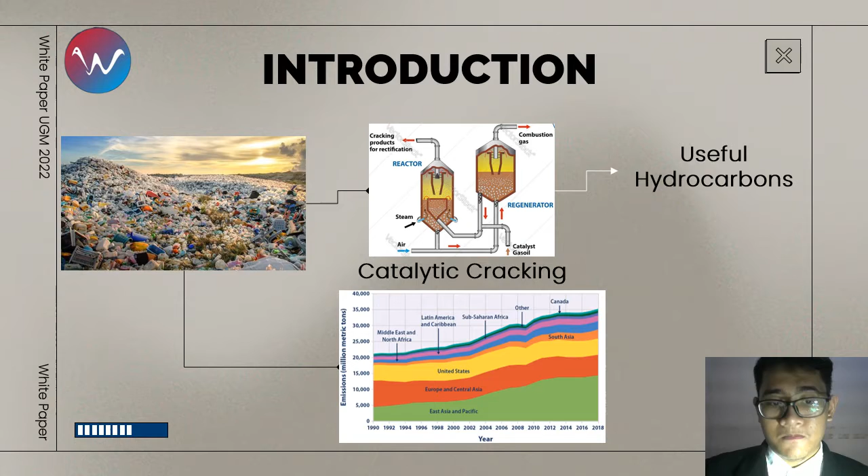Next. So regarding our problems above, what are our solution and designs? We will start with our block flow diagram, in which we will start with plastic catalytic cracking that is done in 400 degrees Celsius. It will produce the required hydrocarbon for steam reforming.

Together with water, it will produce 3 molecules of hydrogen, in which 2 molecules can be used for the Haber-Bosch process with nitrogen that we captured from pressure swing adsorption from the air, and then the ammonia produced can be used for further urea synthesis.

However, 1 molecule of hydrogen will be stored inside a tank, and it can be reacted in Sabatier-Senderens methanation with CO2 into CH4 or methane, which can further fuel steam reforming.

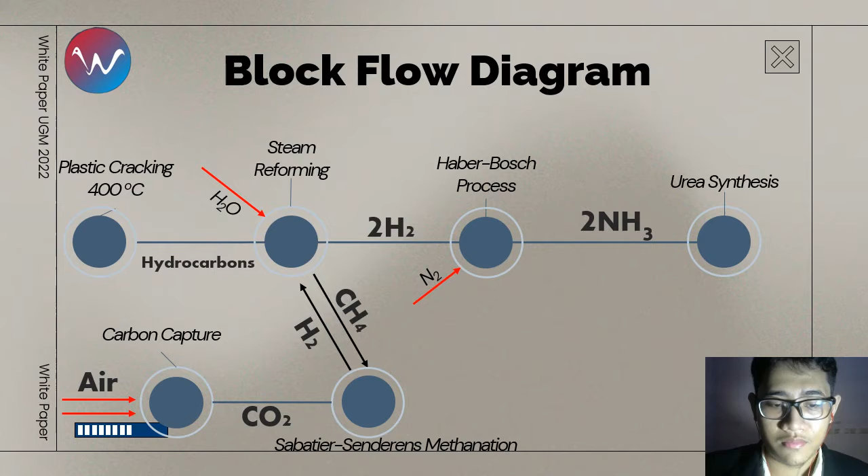We will start with our plastic catalytic cracking process. On the right is our polymer catalytic pyrolysis model, and it will crack the polymer of plastic into the hydrocarbon that is needed as a feed for the steam reforming. Now, the process also requires zeolite catalyst, also with 400 degrees Celsius of constant temperature.

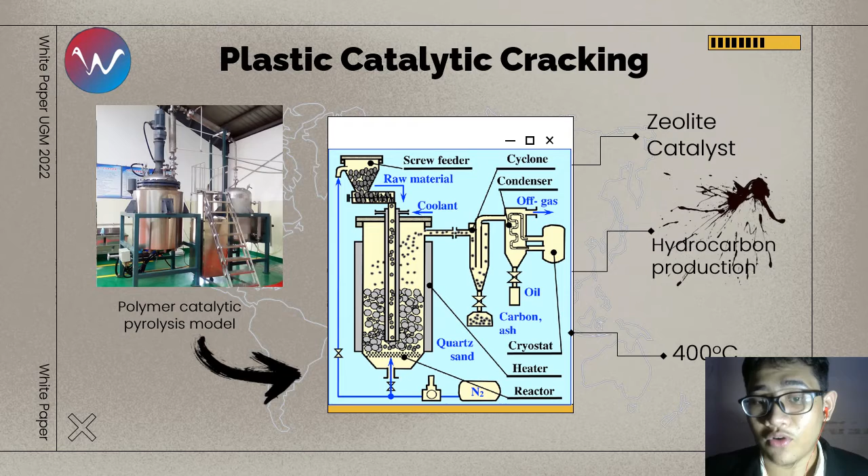Next. And this is our steam reforming model. The steam reforming requires hydrocarbon that is gained previously, and with water it will form hydrogen and carbon dioxide. Now the carbon dioxide will be further used for urea production. However, the hydrogen will, as I explained before, one will be stored in the tank, and the 2 rest will

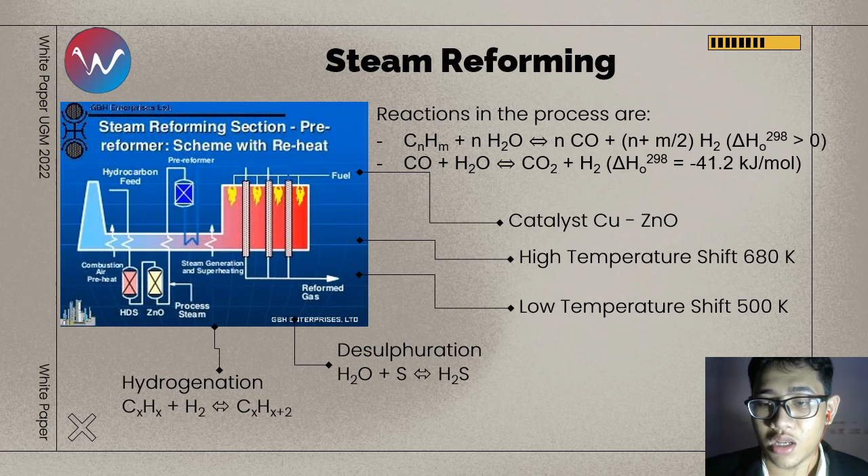be used in Haber-Bosch. Now we will use copper and zinc oxide based catalyst alongside desulfurization and hydrogenation process before the reaction to keep the hydrocarbon clean. There are also 2 types of reaction happening in here: high temperature shift around 680 Kelvin and low temperature shift in 500 Kelvin.

Next. The next is our Haber-Bosch process. The Haber-Bosch process happens at 400 until 450 degrees Celsius within 200 until 400 atm of pressure inside a fixed bed reactor between 3 molecules of hydrogen and 1 molecule of nitrogen, producing ammonia.

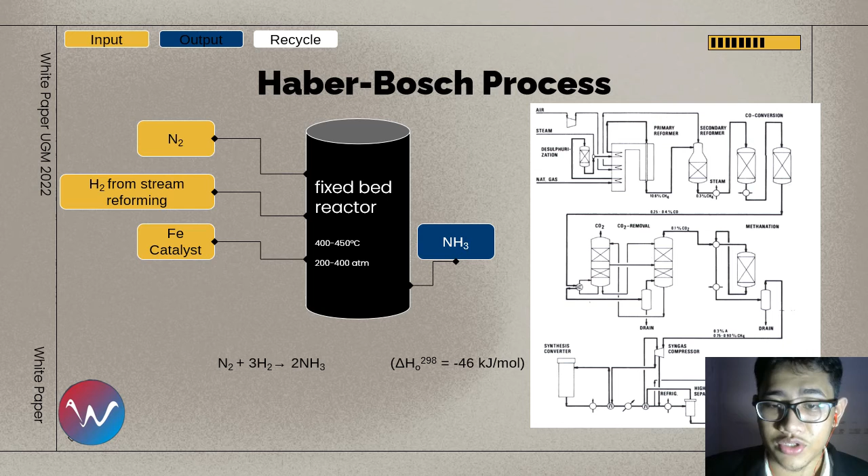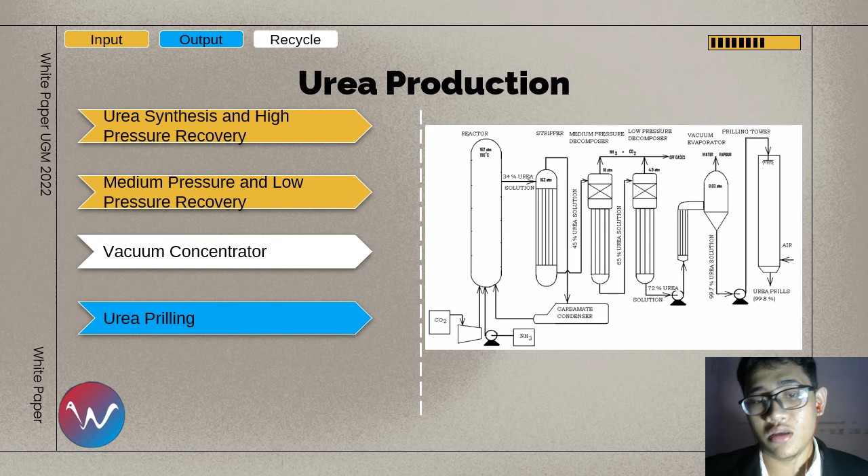That 2 molecules of ammonia will be used in urea production, which consists of urea synthesis and high pressure recovery, medium pressure and low pressure recovery, vacuum concentrator, and urea prilling. Now first is our production and high pressure recovery.

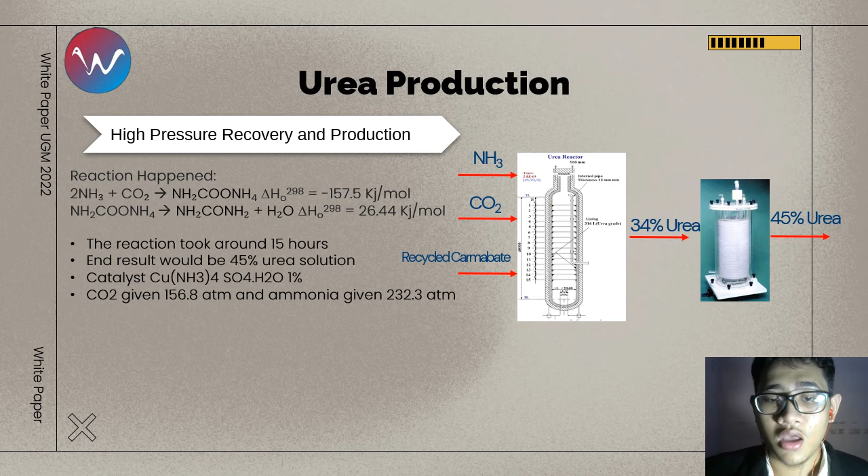The production consists of the reaction between the ammonia and CO2, forming ammonia carbamate, which will decompose into urea and H2O. The reaction took around 15 hours if using copper-based catalyst, like on the screen, and the end result would be 45% urea solution after high pressure recovery. Now, every pressure recovery is actually happening inside the same type of decomposer, and it is a falling film decomposer.

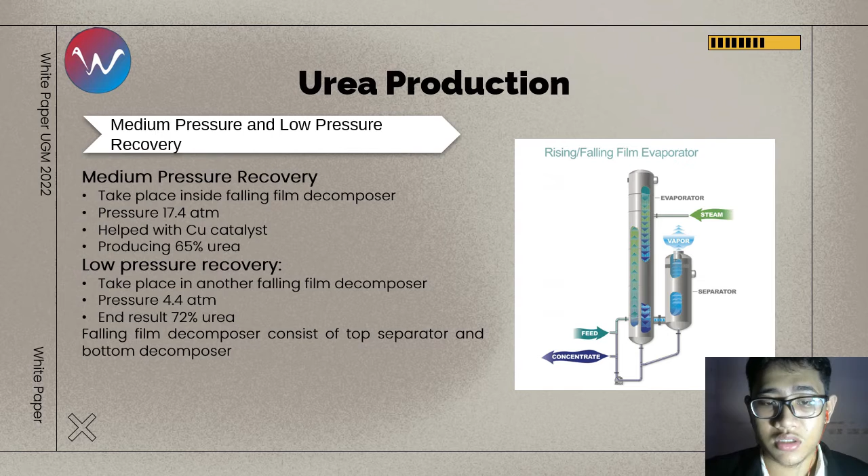The only difference is actually the pressure. Medium pressure recovery happens at around 17.4 atm, and low pressure recovery at 4.4. And because it has the carbamate decomposition, it is also helped with a copper-based catalyst.

And last but not least is urea prilling. This is the simplest but also the fastest step in urea production. It consists of the urea concentrate being dropped from the top of the prill tower, where the cold air will crystallize the urea, and it will drop, where it is harvested and prepared for packing.

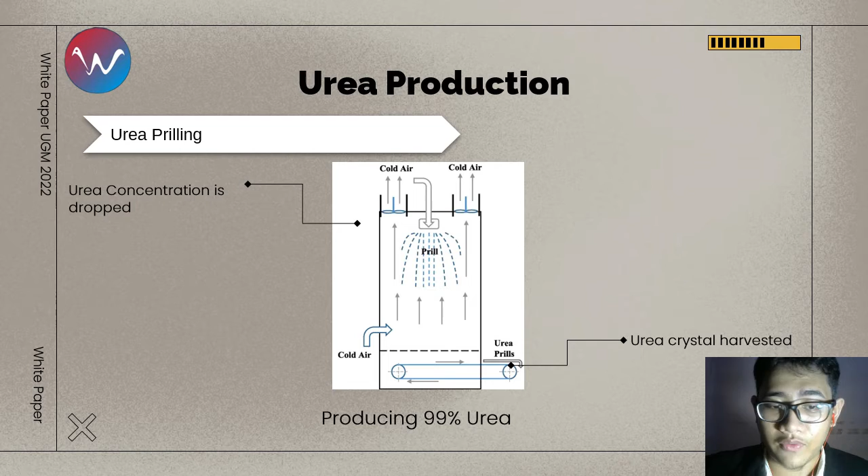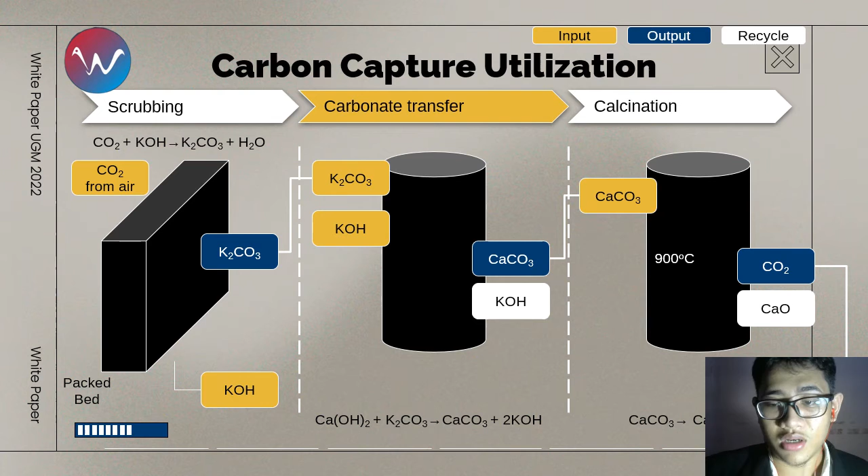Now, here's one of our additions. The first is the carbon capture utilization process. It consists of scrubbing, carbonate transfer, and calcination, in which the various types of chemical reaction, as mentioned on the screen, will be conducted. Next.

And also, last but not least is Sabatier-Senderens methanation, in which the hydrogen stored in the tank will be reacted with the carbon dioxide captured from the air through the various chemical looping shown in the previous slides, and it will form methane through the exothermic reaction. And on the right is the process flow diagram.

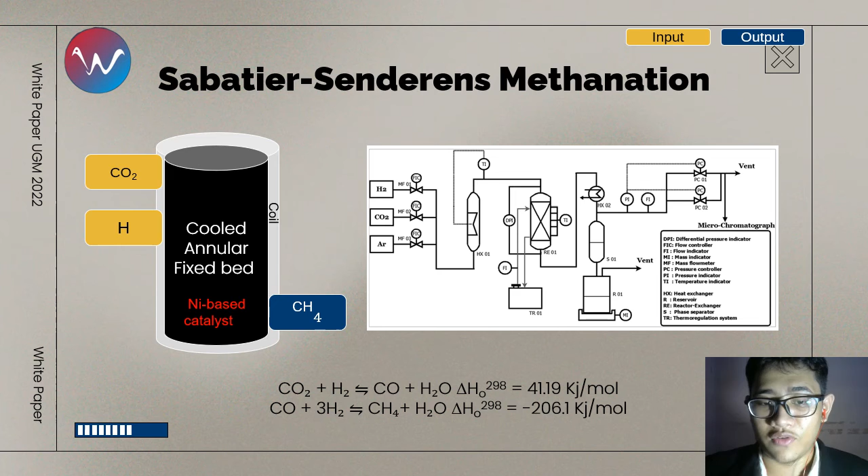Next. Okay, so after all of the processes that have been explained in the previous slides, we are here to propose the reasons this process can be implemented to alleviate the supply chain problems in the F&B industry.

The target that we want to set economically is using plastic waste of 80 tons per day with a 24-hour process with 20 cycles, and a target of 118.8 tons of product generated per day. In the case of the urea product, it will be set at 20,000 rupiah per kilogram, which will set a gross selling point of 160.814 US dollars per day.

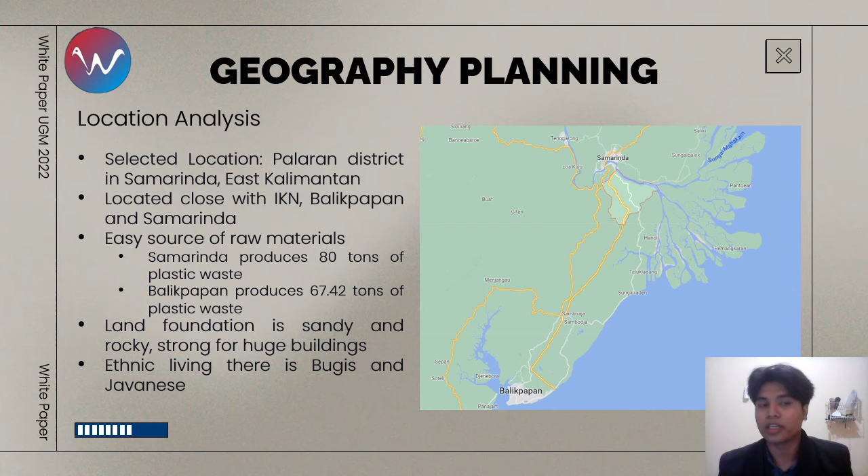We also set a target for our plant location, which is located in Palaran district in Samarinda, East Kalimantan, with several objectives. The first is that it is located directly near our next candidate capital city of Indonesia, the production of plastic waste in those areas is very high, and the land foundation is supportive of our type of project.

And now we present to you the trade-offs, the risks, and the impact of our process on our environment. The first is environmental risk. We have degradation of soils due to over-farming, the acidification from nitrification that happens in our process, and degradation of fertilizer into N2O because we are using urea. We are also dealing with process safety because of non-functioning catalysts, and the product has a probability of being explosive, and toxicity could occur in the process itself.

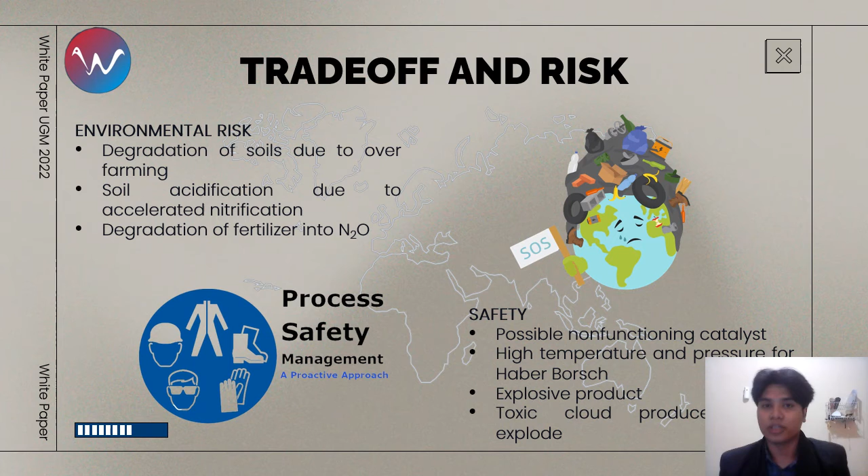The last one is investment and operating costs, which covers the equipment that we need, the amount of safety regulations that we need, and the various catalysts that we mentioned before. But with all of that, we should see the bigger picture of why we want to propose this solution to all of you.

We try to decrease our country's natural gas import dependency. We try to increase our third world nation's food security. We try to increase our national export surplus. And one of the main goals is to reuse our plastic waste, which is one of the biggest problems in our environment right now. And all of that means our process will support the G20 circular economy agenda.

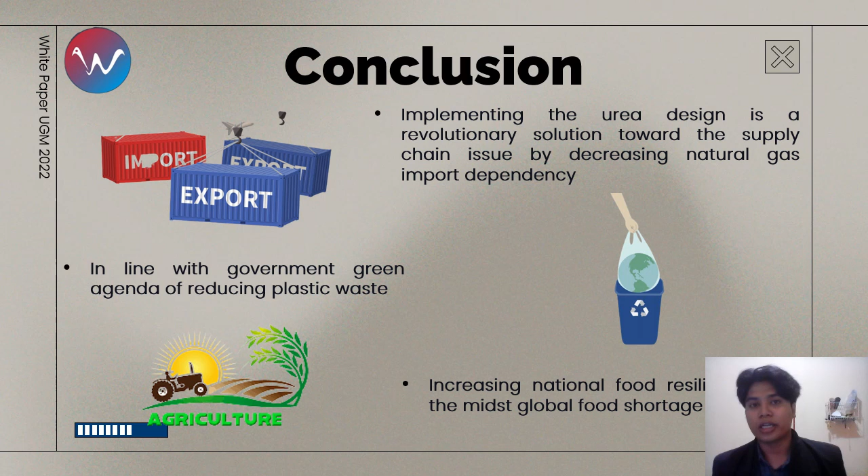So all of that impacts the production itself, which is in line with the government green agenda, increasing national food resilience, and being able to create a new source of fresh air for our food and beverage industry. We believe that our process will help to alleviate the supply chain crisis in the food and beverage industry. So this is our reference.